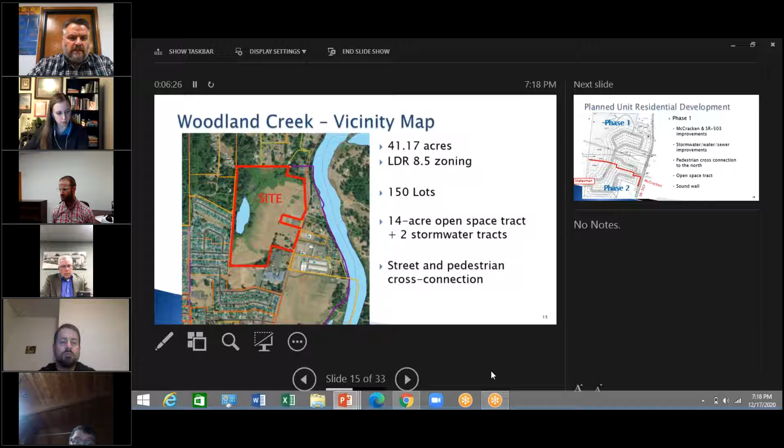The proposal is for 150 lots, of which they will have a 14-acre open space tract plus 2 stormwater tracts, and street and pedestrian cross connections in this project.

This gives you an idea of the planned unit residential development proposal. It's divided into 2 phases.

The first one approximately follows this red line, and it is the north half, and it includes improvements to McCracken and State Route 503, plus the internal roads, stormwater and water and sewer improvements, pedestrian cross connection to the north, the open space tract, and it will also include the sound wall that's being installed along State Route 503.

Phase 2, which is the southern half, will actually include the cross connection to Statesman and the pedestrian connection to the school. Now I bring these up because this is approximately what's proposed, but this final boundary may change during the final engineering for this project.

So they'll have to take a look at the utility provisions and how to get the water and sewer connections. So they may ultimately change this, but I just wanted to make sure that people understand that the entire subdivision may not occur as a single project.

The planned unit residential development allows for flexible development standards, and it includes flexible street standards, increased density from 6 to 12 units per acre. And this project that's being proposed and discussed tonight is approximately 7.09 net units per acre.

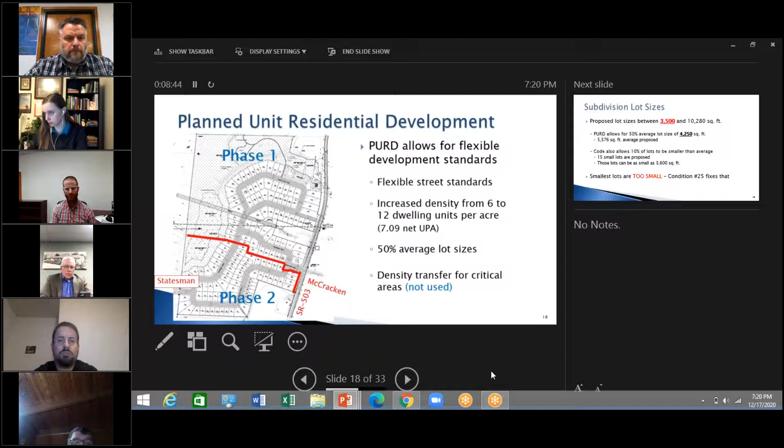So the subdivision lot sizes, proposed lots are between 3,500 square feet and 10,280 square feet. The planned unit residential development allows for the average lot size to be 50% of that allowed under code. And that would allow average lot sizes to be 4,250 square feet.

And the applicant is proposing a subdivision that has 5,576 square feet per average lot. So that meets the PURD code.

Now the code also allows for 10% of the lots to be smaller than the average lot size. And in this case, they are requesting 10% of the lots, or 15 of them, to be smaller than the minimum lot size. And those lots can be as small as 3,600 square feet.

Now you'll notice that the smallest lot size proposed is 3,500 square feet, and that is actually too small as allowed by code. So staff has had this discussion with the applicant, and condition number 25 remedies this by requiring the 5 3,500 square foot lots to be at least 3,600 square foot lots prior to recording of the plats.

Now the subdivision itself, the transportation issues that were reviewed include internal circulation streets. There are some smaller than normal streets that are allowed under the planned unit residential development, and it includes some 28-foot streets. And according to the fire code, if you have less than a 30-foot road surface, that you are limited to parking only on one side.

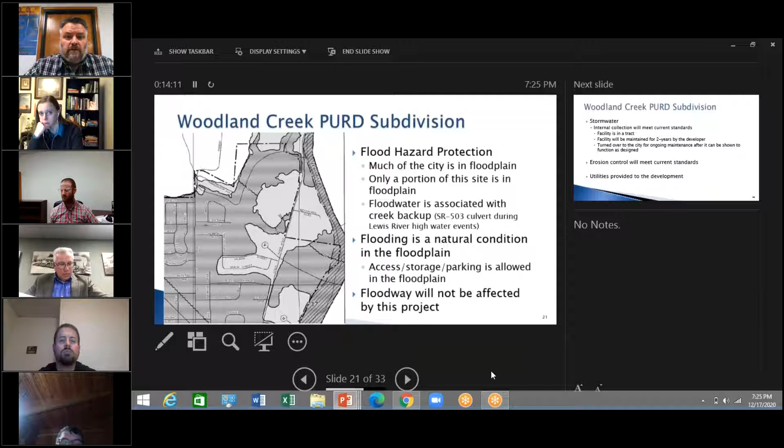So what we're seeing is a backing up of water as opposed to Lewis River water that's actually flooding into Robinson Creek. It's also important to note that flooding is a natural condition in the floodplain, and the flood ordinance does allow for access, storage, and parking as a permitted use in the floodplain, and the floodway will not be affected by this project. There are substantially higher development standards and requirements if you're trying to develop in a floodway, and this project does not have floodway in the project.

So that kind of is a segue into the stormwater. Stormwater will be collected internally, and it will meet the current city standards. The stormwater facility for this project is in a dedicated tract. That tract will be maintained by the developer or the homeowners association for at least 2 years. Once it can be demonstrated that it is working and functioning as designed, it would be turned over to the city for ongoing maintenance of that stormwater facility.

Erosion control is being proposed and will have to meet the city's erosion control standards. The applicant will be providing utilities like water and sewer from the city, and they will also be providing private utilities like electricity and gas from the private utility purveyors.

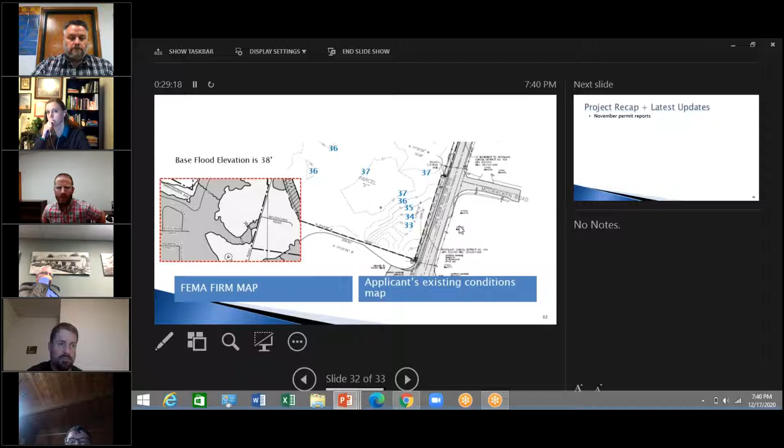All right, great. Sam or Jason, do you have any questions before we move on? Sam doesn't have any questions. No, I'm enjoying this. All right, good. In that case, let's move on to an applicant presentation if we got it.

The goal of the open space area, which is approximately 14 acres on this site, is to keep it in a natural state.

We want to remove all the blackberries, and as part of the conservation covenant, there will be a mitigation or maintenance plan required for removal of blackberries. Sometimes that's mechanical with mowing, and other times it's with spray, because you have to kill those and get them out so the native trees and plants can grow back.

There may be some additional work we do in the future with WDFW or with the city for any mitigation type plantings. At this time, we've avoided all critical area direct impacts. We're not proposing to fill any wetlands or streams or put in new culverts or cross any streams. What we're proposing is a footbridge that could span over the ditch and connect to the north side, to minimize any impacts there.

The trail is proposed as bark. It could be a paved or gravel trail if the city really desired that, but I think the impacts with the open space and buffers are minimized if we use a bark trail.

There will be some other pieces to the mitigation and monitoring required out there beyond blackberries. That'll be worked out between the city, WDFW, and the applicant.

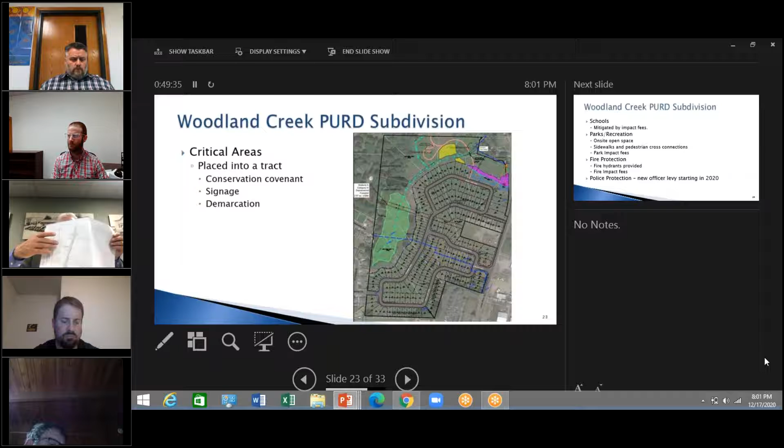One more piece that Brian mentioned earlier that I forgot to clarify: infiltration is being used on some of the lots for roof runoff, which is clean stormwater - it's not where cars drive - so that can be infiltrated directly into the ground. That really helps to avoid a giant storm facility, although we already have a very large one since this is a very large development. The wet ponds are two big cells of stormwater with a big rock berm in the middle, so you might recognize similar ones around town - it's a common type of stormwater facility.

And so the stormwater flows in and is treated on one side and it's detained on the other, and then it will be released to the north outside of the creek area, closer to the ditch. Like I mentioned before, it's released at a very low rate, which is below pre-developed rates for this entire basin. So the stormwater has been designed to treat this whole basin.

WSDOT's facility is separate. It is a little wet pond as well, and that would be in public right-of-way. That tract or that right-of-way area will be donated to WSDOT.

The infiltration would be in the backyards, I believe, for a lot of the roofs, and so there'll be private stormwater infiltration systems. All the other runoff will be sort of traditional catch basins that collect it in the road, and they'll be piped to the storm facility. So not a lot of surface flow will go into that storm facility. Most everything's going to be collected in catch basins and underground and going in there.

Do you have other questions on stormwater?

You mentioned some of the lots will have infiltration. Do you know, can you tell us how many or a proportion?

I don't actually know right offhand. I'd have to look at the plan that my engineers worked on. I know it was discussed, and it's feasible. Its feasibility can be driven by groundwater. So if groundwater comes up too high, then you don't want to use infiltration. You'd rather convey it and just do a little bit bigger stormwater facility.

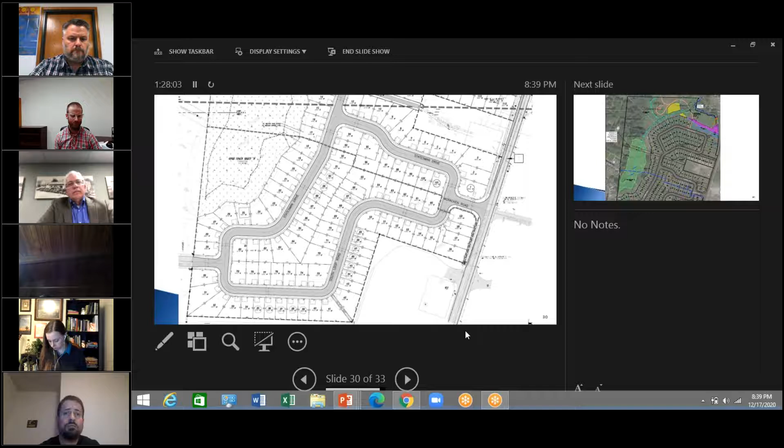So what I currently saw out on site is a speed limit change where you sort of leave the city limits. It is not at the north edge of the urban growth boundary, but it is the city limits currently. There's a line that goes across the road, a thick dashed line, and that's where the edge of the city limit cuts across and goes from the east side to the west side. So that's the technical city limits.

The speed limit change is north of that, where there's a culvert. It's actually towards the very north end of this map, where the project has a big jog in it. That's right where the speed limit goes 50 miles an hour to the north and 35 miles an hour to the south. So it changes to 35, but I'm sure people are traveling quicker than that as they're coming into town.

My thought is maybe we could talk with the school, see if they're interested in a 20-mile-per-hour flashing sign that goes on during school hours. Then people would see that and slow down. Some kind of signage like that would be placed hundreds of feet ahead of that, which would be close to our entrance probably. And we'd be willing to entertain working with WSDOT and the kids' school and trying to coordinate that effort.

Like Travis mentioned, WSDOT does set those standards, and this is a state route, so they're going to want to see traffic flowing quickly and large volumes of traffic. So I don't know if we'll ever get it to go lower than 35 miles an hour, but I think they could make provisions for school flashing, students present, 20 miles an hour speed limit flashing signs. So that's something that we could propose to WSDOT next time we talk with them. Travis can do his email to WSDOT and ask if there's any opportunity for slower school speeds and try and increase the safety in front of the kids' school there.

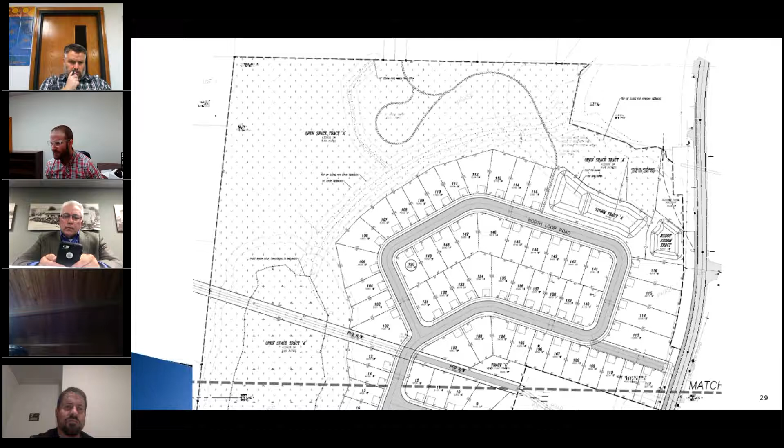So that's not telling you a lot, but sorry, I thought they actually listed some examples. The first thing it lists is infiltration. Also, again, I'm not an engineer, so I might be exposing my ignorance, but there is some treatment going on in their stormwater tract, like it's treated or cleaned in one before it goes to the other. I don't know if that's part of the LID development or not.

So I have worked in stormwater a bit, and the jurisdiction I was working with was the city of Portland. They maybe have a little bit different idea, but when I was working there, the city of Portland would not consider detention ponds an LID BMP. An LID BMP would be like rain gardens, potentially green streets, pervious pavements, green infiltration roofs. Sure, infiltration is always going to be part of it for sure.